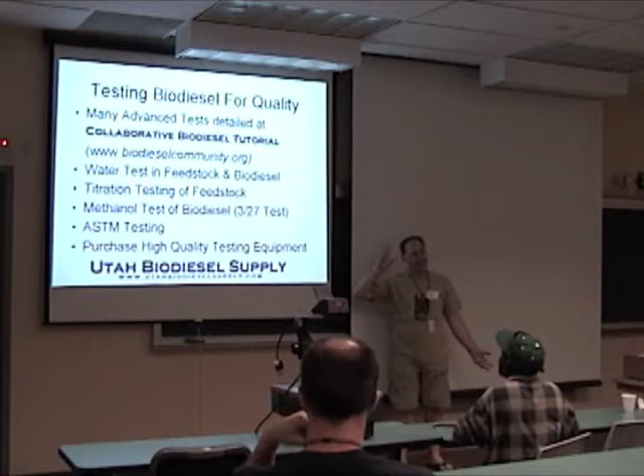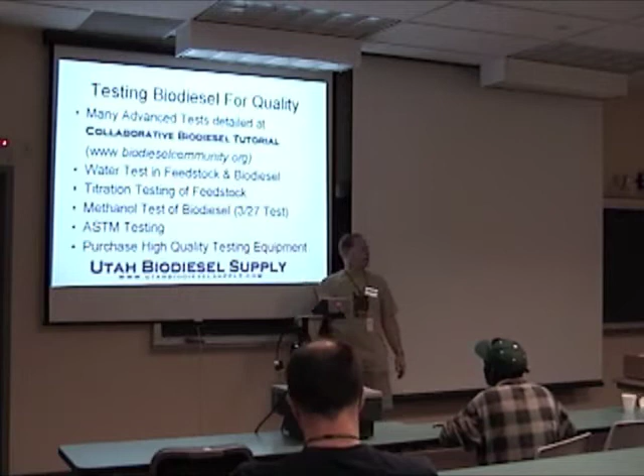There's many advanced places you can learn about making biodiesel. One of them that I particularly like, I'm biased because I helped create it, is the collaborative biodiesel tutorial. If you've not been there, I would encourage you to go there and begin reading. It's biodieselcommunity.org. On there, you're going to find advanced testing methods. You're going to find things about theory. You're going to learn a lot.

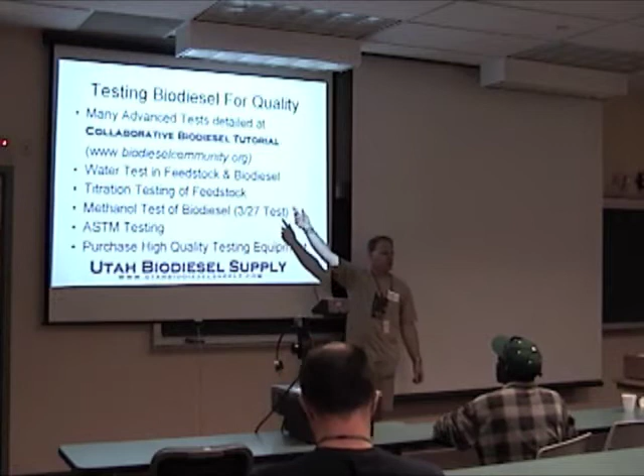Today we're going to talk about a couple tests, though. We're going to talk about water, how to test for water in feedstock, how to do a basic titration test. Most of you may or may not know. I imagine, how many of you have done a titration? Okay, we won't spend a whole lot of time on that.

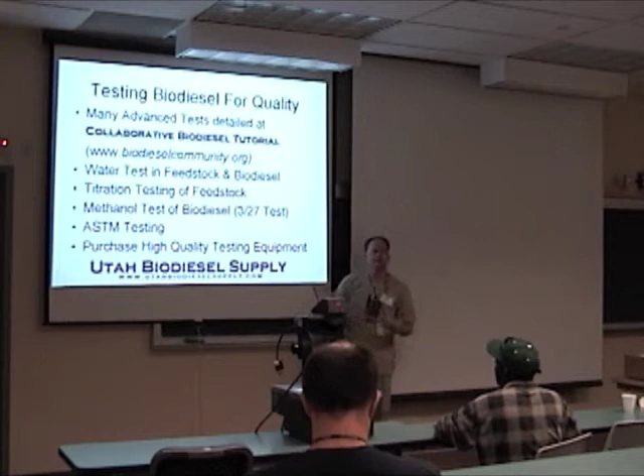Methanol testing of biodiesel, which he alluded to this morning, Bob. We're going to talk about that and ways to do it, and I'm going to tell a little bit more about what's going on. I'll touch on ASTM testing, and then we'll talk a little bit about if you really want to get into that high-quality testing equipment. I've got some slides of different equipment. So, Steve, if you want to come on up, we'll kind of swap off and go through some of these.

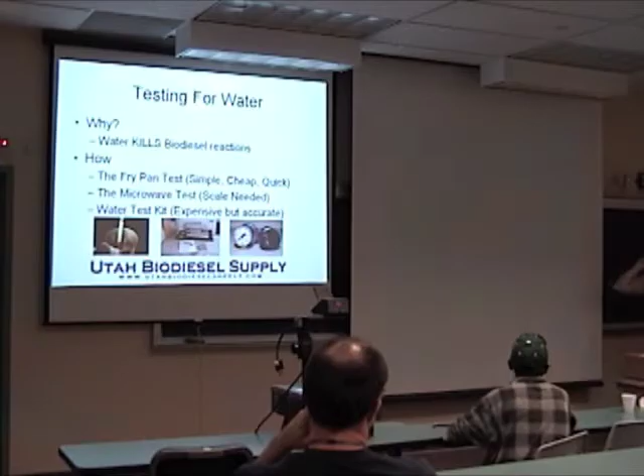How many of you have gotten biodiesel or oil with water in it? How many of you have tried to make biodiesel with water in it? How many of you have made glop? No, that's nasty stuff. Oh, that's okay. It's not fun, is it?

Just a little bit of chemistry. Oil plus methanol plus lye equals biodiesel. Oil plus water plus lye equals soap. And unfortunately, the water likes to attack the oil quicker than the methanol and the lye. So you'll get soap quicker than you'll get biodiesel, and it'll kill a reaction faster than anything I know.

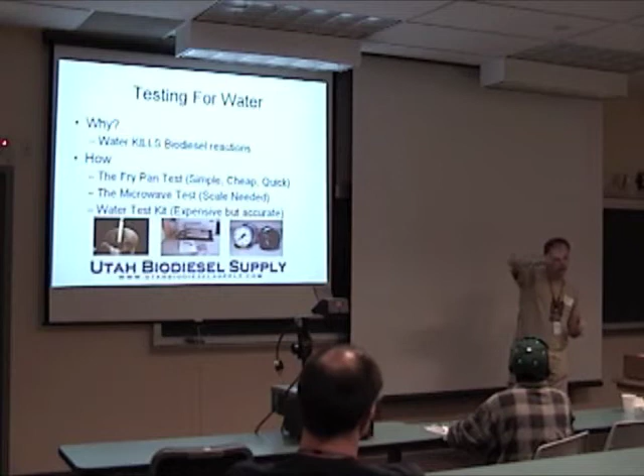In fact, I've read some things where a cup of water in 50 gallons of oil will keep you from hitting ASTM. I mean, it is that bad to the biodiesel process.

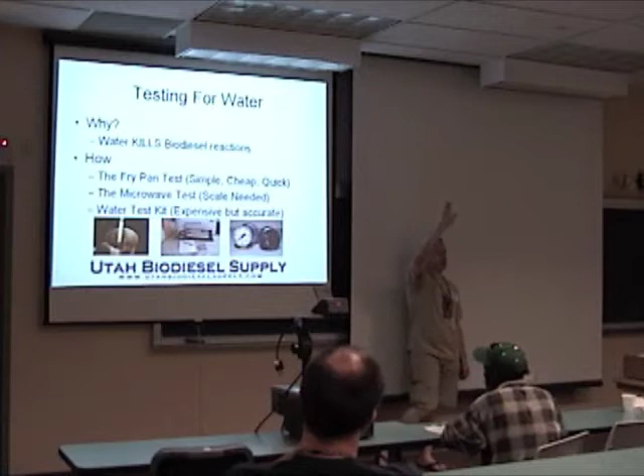So there's various ways that you can test for it. I'm going to go from the quickest to the most expensive, if you will. The easiest one that most of you have probably done, how many of you have done a fry pan test? Okay. What that is, you take a simple pan and you put some oil in it, what you think is good oil, and you put it on the stove and you watch for bubbles. That's it. You just watch for bubbles.

And keep your face out of it. And keep your face out of it because steam's not fun, huh? And it kind of smells bad.

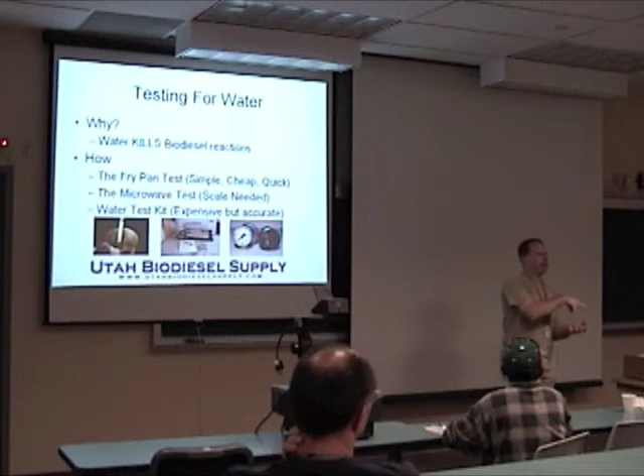That test works. And for most biodiesels, it works quite well. However, it's a subjective test. It's subjective to your ear, listening to the bubbles. It's subjective to your eyes, watching for the bubbles. And it's subjective to how much biodiesel or oil you've put in that pan. If you put a very small amount, you're going to get a little bit quicker bubbling action. If you don't, it may take a while, and you may have that temp up. Your thermometer's sitting on the bottom where the heat is, and you're just frying away. This is kind of an example of that.

I just wanted to make a recommendation, something we picked up at Harbor Freight. For $40, you can get an infrared thermometer, so you can be several feet away. That's like the coolest $40 we've ever spent. We use it all. Can you repeat it? It's an infrared thermometer, and they're really cool. Where do you get it? Harbor Freight. It's like the biodiesel toy store. Or eBay.

$30. One thing you have to watch with them is you have to look at the accuracy of them. A lot of them, you pull out so many feet and you've lost your accuracy. 1 to 1. Yeah, some of them are really sensitive. And you'll also find that if the pan you use is reflective, if it's a silver or gold colored pan, you'll get a much less accurate reading than if it's cast iron. It's a black pan. There you go. The reflective surface reads a lot less accurate. And I would say with every test we talked about today, there's some pluses and there's some minuses to it. I'll try and touch on those and Steve will as well.

You want to touch on the microwave test? Have you done that one? You had it in your slides? We actually don't use a scale. We just look for bubbles. So we'll take a 100 milliliter beaker, 50, maybe half full of raw oil, and just nuke it for a minute, maybe a minute and a half. If it's bubbling, sputtering, and popping, we know we've got an issue.

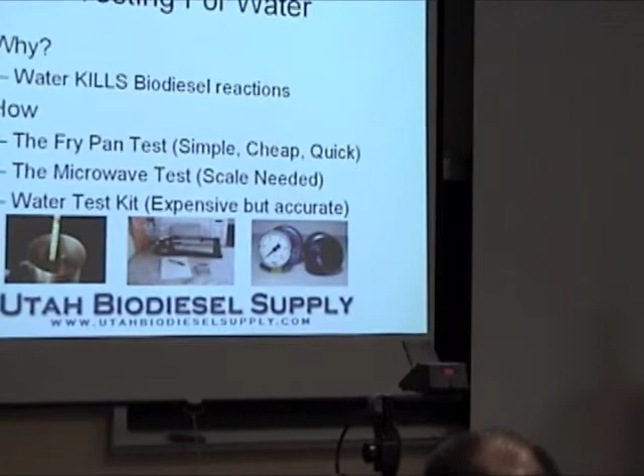Okay. The microwave test is kind of a combination of a fry pan test with a scale. Essentially, the theory behind it is you take a sample of oil, you weigh it with a very accurate scale, and then you put it in a microwave and heat it for a period of time, preferably past the boiling point of water, take it back out of the microwave and weigh it. The difference in the weight, there's a formula on biodieselcommunity.org that will tell you what that equates to in percent of water in your oil.

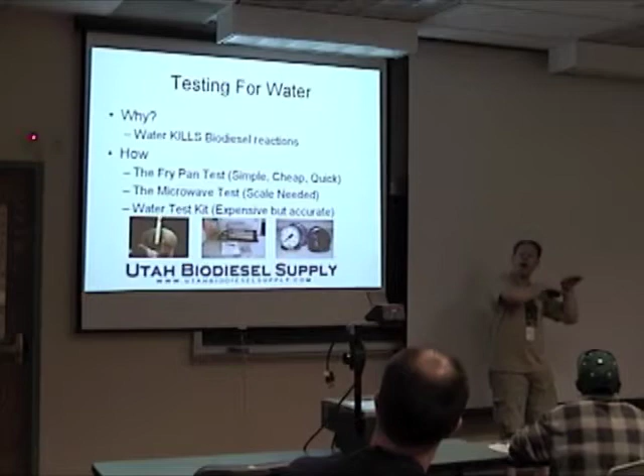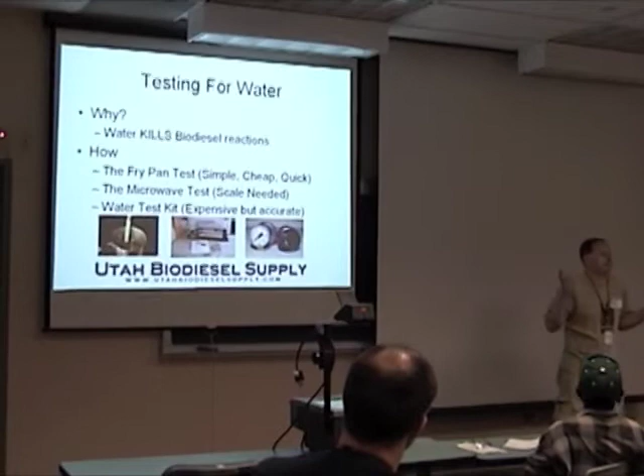More than 2% of water in your oil, and 2% is not much. I mean, think about a 50-gallon tank of oil, 10% of that is 5, half of that is 2.5, so 2 gallons of water in 50 gallons. Sounds like a lot, but if it's mixed all through there... That'd actually be 4%. It's 4%. So 2% is even less than that. 1 gallon per 50. That'll kill a reaction. I mean, it does. You might get something, but I don't know that it's going to be biodiesel. So anyway, that's how that test works. The next test is a test that's a little bit more accurate.

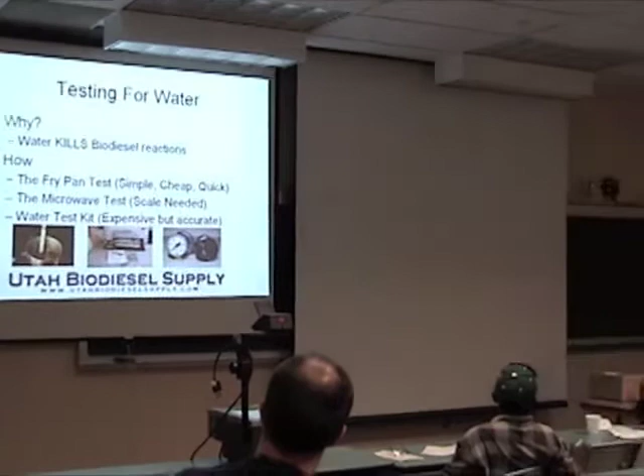The ASTM people use something called, well, I guess Karl Fischer's not ASTM approved, not yet. That's one way, but they have other ways. Another kind of quick and easy way is something that a lot of commercial producers have started using. I went to a lab down in New Mexico, or a factory, and I found this, and I'll pass it around. It's simply a gauge, a pressure gauge, that's all it is, with a little vial.

Inside this little vial you put in calcium hydride. It comes with a pre-measured amount, you put it in, and then you put oil in it. Calcium hydride is an interesting chemical in that it reacts with any water in oil and produces hydrogen gas, which then produces pressure. You read this pressure, compare it to a scale, and you know exactly, down to 50 parts per million, how much water you have in an oil. This can be both in biodiesel as well as in an oil substance itself.

The test was invented by Mobil 1 for testing water content in hydraulic fluids. If any of you run hydraulic equipment, water in the oil will destroy it fairly quickly. So they wanted to be very accurate, and we've adapted these tests. You put it in, shake it up, give it a minute, look at the gauge, and off you go. It can read anywhere from 50 parts per million up to, I don't remember, but you basically halve your recipe and it allows you to go way up.

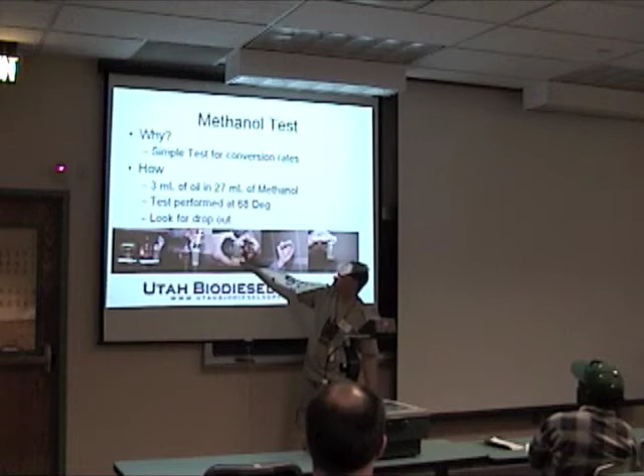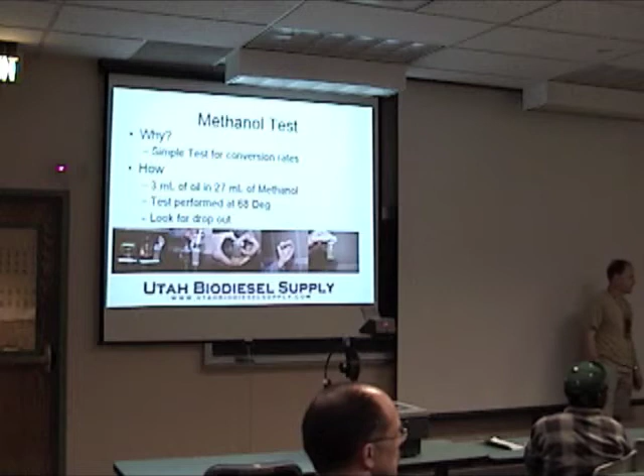So we put it in, shake it. This is a really good sample of bad stuff falling out. See how bad that is; this is before, though. This is what ours is looking like right now. But if you get immediate dropout, you know you've got something going on. If you don't get much, and I really don't see much in that, that looks like good fuel. A lot of times you can tell when you drop the biodiesel in, because it'll just go to the bottom and sit there rather than hit this right away. And then you pretty much know if you shake it that this ain't gonna work.

So we're about to find out on this other one, this is unwashed? Yeah. How good it turned out? He can wash it and leave the glycerin in the bottom. He's that good. Oh wow. That's even better. Look at that. I don't see any, got that thing nice and clean. So you're saying the unwashed came out cleaner than the... Well, this is different batches. Right. Okay. Every batch is different.

Hi, I asked this to you before, but I thought I'd ask it again so everybody can hear it. When we do the 27-3 test, we get a cloudy result. We don't always get the oil dropout, but on a couple of batches, the entire thing is cloudy. Like this one we had, or a little bit more cloudy? Much cloudier. So I know that it's an indication of a problem, but I don't know what that problem is. And Bob didn't even know. He suspects it could be water, it could be oil, it could be triglycerides. If it were oil, it would drop to the bottom. So it's something else contaminated. Yeah.

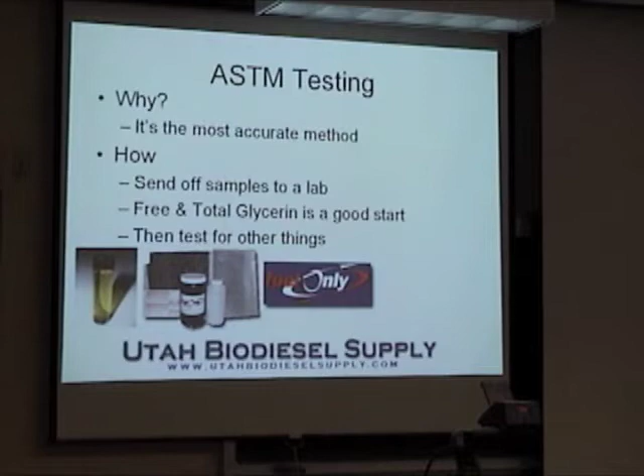What you basically do is they will send you a kit. This is from a company called Fuel Only. They typically will send you out a bottle to put your sample in, which goes in another bottle, which then you seal, which then you wrap some absorbent around, which then you put in a plastic bag, which then you put in a box, which then you also put packing material around it, and you send it off to them.

And when it gets there, this is all the packing material that comes with this thing, and there's a lot, but they don't want it to leak. They test it, and after they tested it on the equipment that Rachel so eloquently told us about this morning, they send you back results, and you can use those results to certify. Well, I guess you really don't certify yourself, but you can prove that you can make good fuel, and you can make fuel that meets the ASTM standard.

There are several tests within that ASTM standard. Tests for total and free glycerin, $79.95 if you use me. You can get it all over the place. What I would encourage you to do if you do get a total and free glycerin test, get one that breaks out the triglycerides, monoglycerides, and diglycerides, not just your total and free, because that really doesn't tell you, in my opinion, much. The reason you want to spend that 80 bucks is to identify how many monoglycerides are still there, how many diglycerides are still there, how many triglycerides.

Bob didn't go into it, but last year he talked quite a bit. I've got a little bit of time, so I will. If the ratio of monoglycerides to diglycerides is higher than triglycerides, then you're getting better reactive fuel. Remember his graphs today, you push it this way, you get better reactive fuel. At the tail end this way, you get more triglycerides. You want fuel that has more esters, monoglycerides, and diglycerides than it has triglycerides. And having the test results come back with those broken out will tell you what's going on in your biodiesel reactions. So then that money that you spend is really meaningful.

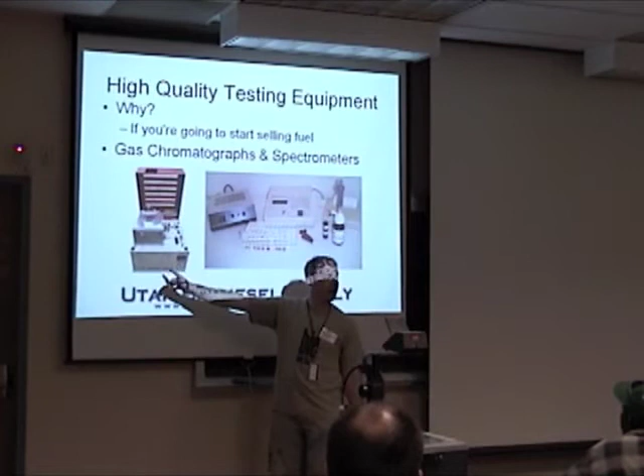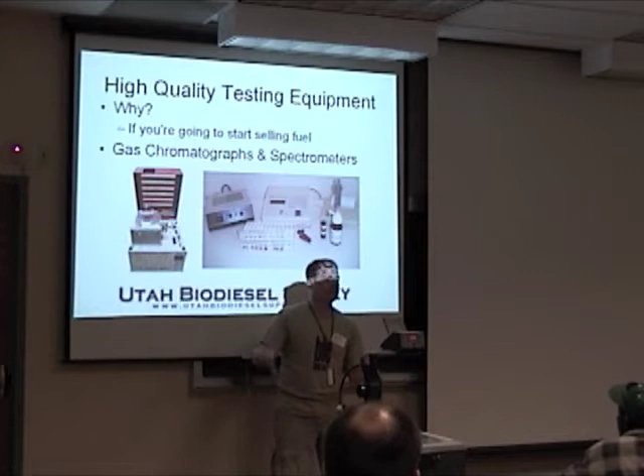Let's talk about high quality testing equipment. I've got some pictures of it. You showed a lot more pictures than I have this morning. If you want a fairly inexpensive gas chromatograph, there's a company that built them specifically for biodiesel. They're available at B100 Supply. It's still not cheap, $7,795 is what I looked at last night on his price. Then you've got to get the hexane, and all these additional things that go with it. But gosh, it's great to have those gas chromatographs. So this is what a gas chromatograph looks like.

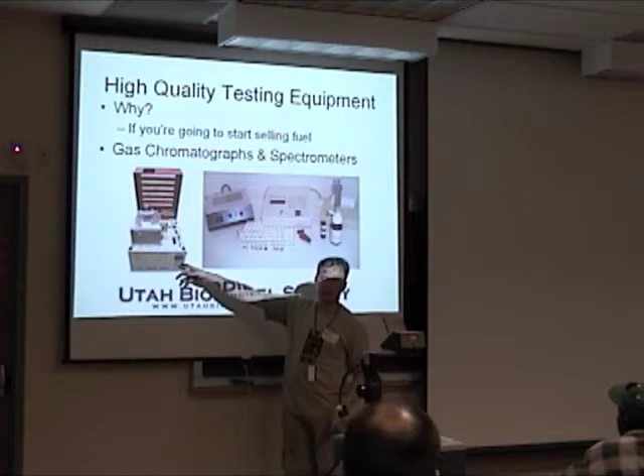There's also a product on the market called SafeTest. We have it. I use it. I didn't get a chance to talk about it. You want to comment a bit about it? I'll tell you one thing: customer service from the company I'm not impressed with. But the machine's cool. I wish I had the data, because I just participated in a SafeTest to GC correlation with our fuel and five other commercial producers, testing their final product with the SafeTest method, and then running the same exact sample in GC. And it was pretty amazing.

My test specifically, if something came out to be 0.23 on the GC, it might have read like 0.20 on SafeTest. Sometimes there's a slight variation lower or higher. We use it as kind of an advanced firewall test in our process. We do an extensive lab wash after the batch has been settling, and then if it's like 0.16 or 0.15, we'll let it go. Because actually, when I did the correlation on our fuel, it was right on, like the GC was 0.15 and SafeTest too.

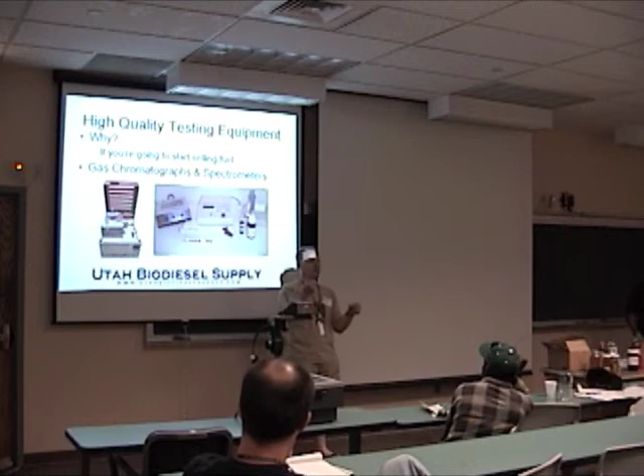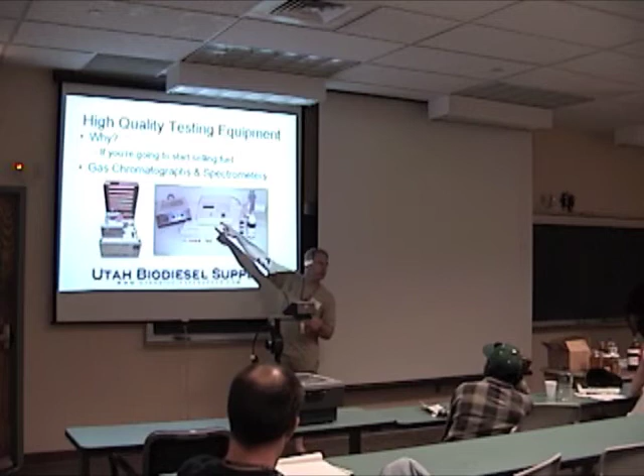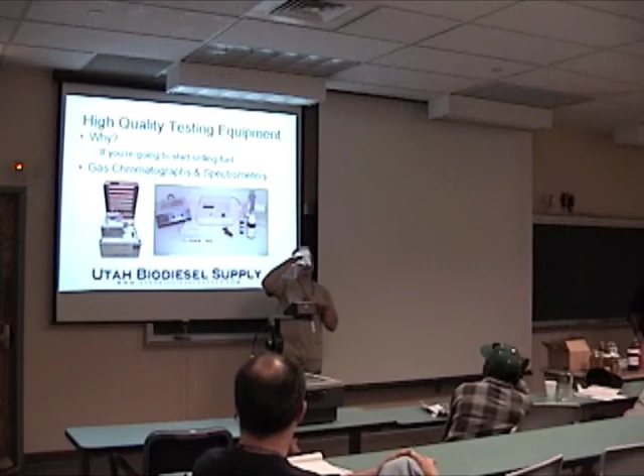The safe test is a test where you simply pull a sample of biodiesel, just like the 327, put it in a vial, take a sample reagent, put it in the vial, and then there's also a solvent, and then you put it in this thing and you literally hold it there, 1, 2, 3, 4, 5, pull it out, and it spits out your glycerin level on a piece of paper that you don't have to interpret. The gas chromatograph, remember, you've got to interpret those peaks, lump them together and say, okay, I think this is tri, di, and mono. And so it's a very quick test. Within 5 minutes, you know what your total glycerin is.

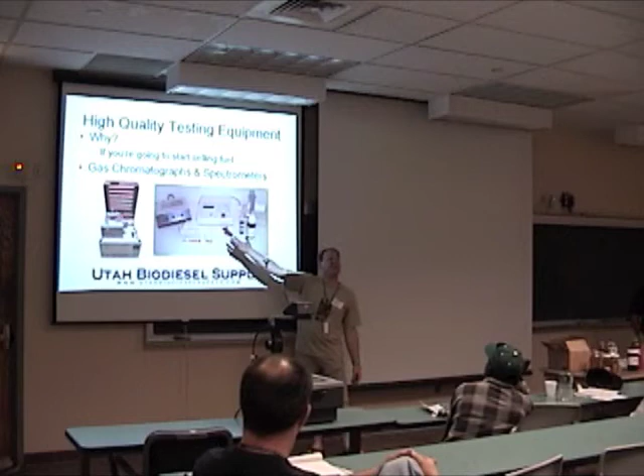It's not cheap. It's, I think, $7,500 to get you started. And then, as she said, the reagent stuff for it is a little bit more expensive as well. But it is an option. Have you seen them before? Yeah, for national. I carry them as well. I sell them. I've just not been too impressed with the customer service though. But the equipment's good. Do you talk to Dwayne?

I'll talk about Dwayne afterwards. But yeah, a bunch of resources for you for testing.

How many of you have B100 Supplies Brewer's Guide? Get it. Is that the green one? No. The green one is the one by Alovert, which is also a good guide. But this one is from Rick. It looks like this. Oh, mine's got a bunch of crud on the front of it. It is really, really good. I'll pass it around. There's a whole section in the back on testing. He wrote it specifically for home brewers. It talks about production. He's got safety things in here. He's got the ASTM testing things in here. I'll go ahead and let you pass that around. I think it's $20. That's $20 you'll spend to get a good manual on how to make biodiesel.